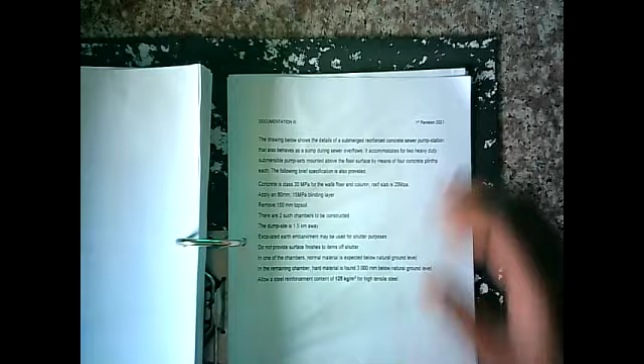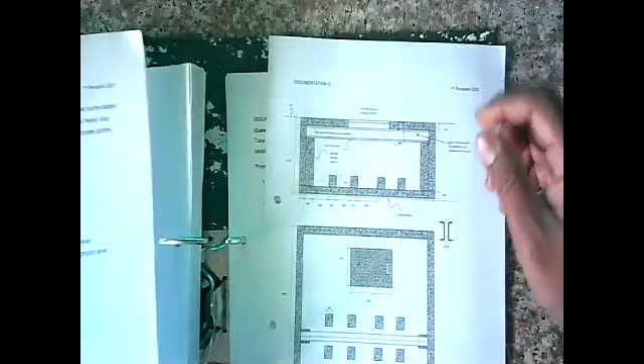All right, page 63, and we're looking at the next question, question 3. And we've got here the drawing below shows the details of the submerged reinforced concrete pump station. All right, now this particular question was, I suspect, a past year test question. So good practice for you guys for a test. All right, so let's look at question 4.

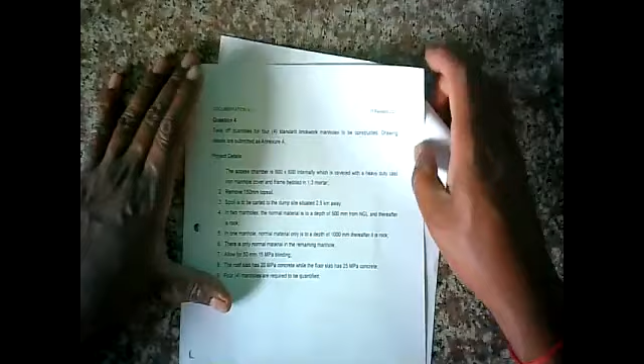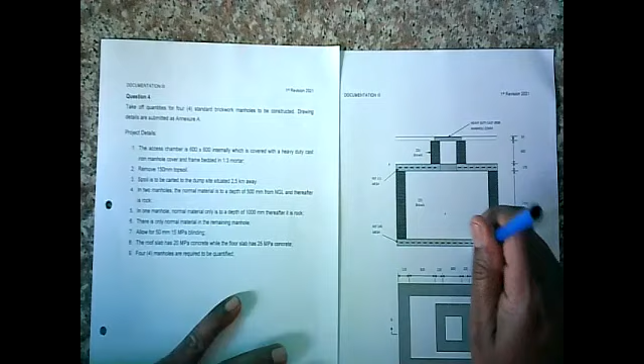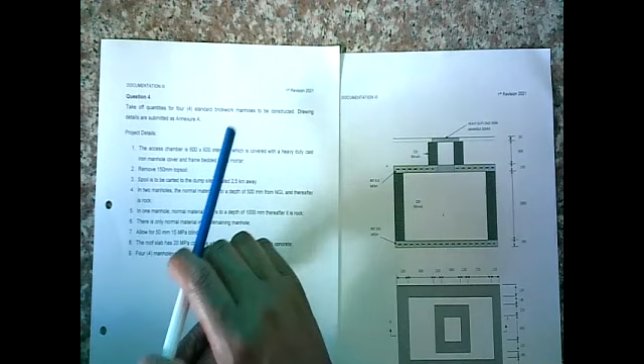All right, question 4 on page 65. And let's get the drawing out. So question 4 on page 65 and 66 asks you to take off quantities for 4 standard brickwork manholes to be constructed. Drawing details are submitted as Annexure A, and here's Annexure A. Project details: the access chamber is 600 by 600 internally, which is covered by a heavy-duty cast iron manhole cover and frame bedded in 1:3 mortar.

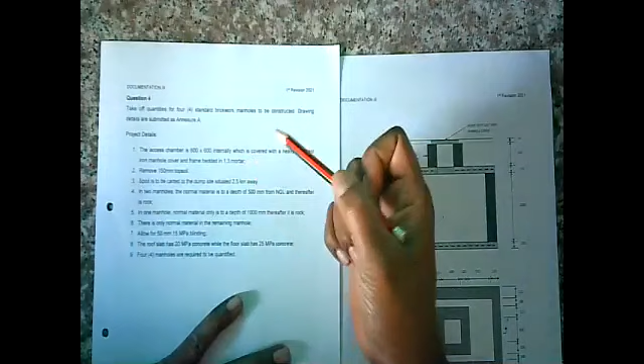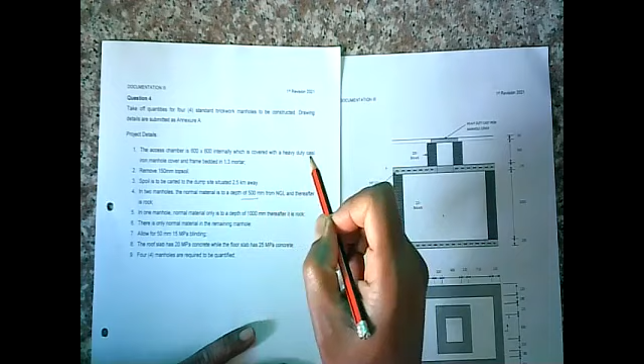All right, remove the topsoil. We know what to do with that. Spoil is to be carted to a dump site situated 2.5 kilometers away. We know how to handle that. All right. 2 manholes: the normal material is to a depth of 500 millimeters from natural ground level, and thereafter it is rock. In 1 manhole, normal material is to a depth of 1 meter, thereafter it is rock. And there is only normal material in the remaining manhole. Oh crap, now what? Multiple conditions.

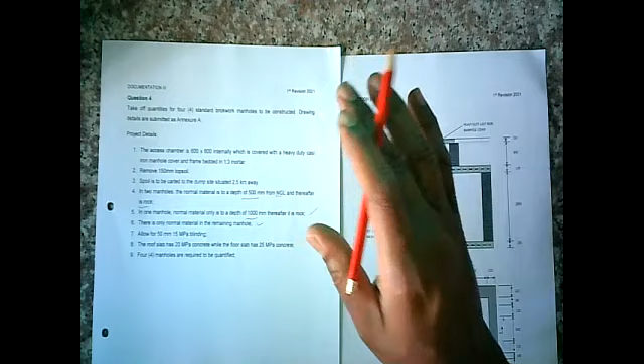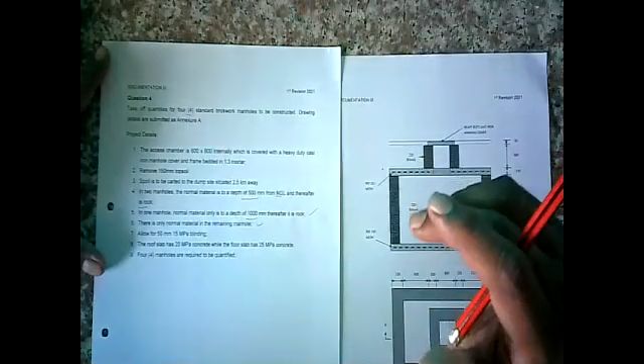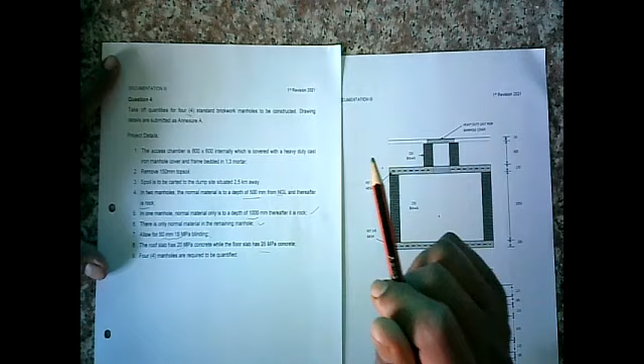And I chose this particular question because coming off the last one, a lot of students may still be a little bit shaky on the concept of extra over, and this question should give you a better idea. Also, we have 4 items. The first thing that should come to your mind, the factor column. Allow for 50 millimeter, 15 MPa blinding. The roof slab is 20 MPa concrete, while the floor slab is 25 MPa. Coming after the last one, 3 different strengths, so we know what to do there in terms of the line items for the bill of quantities.

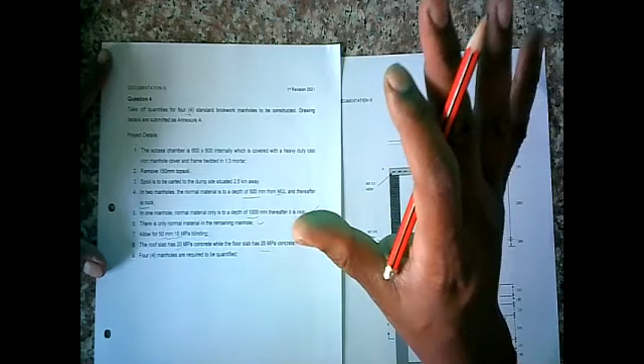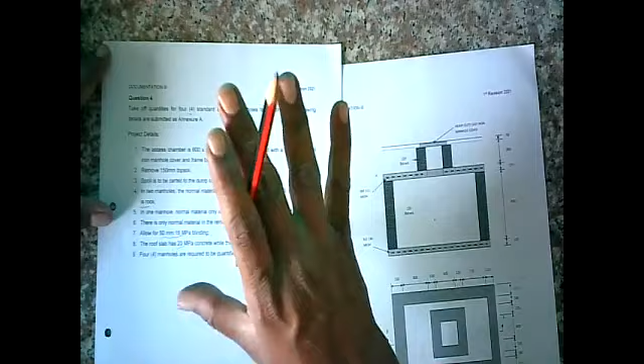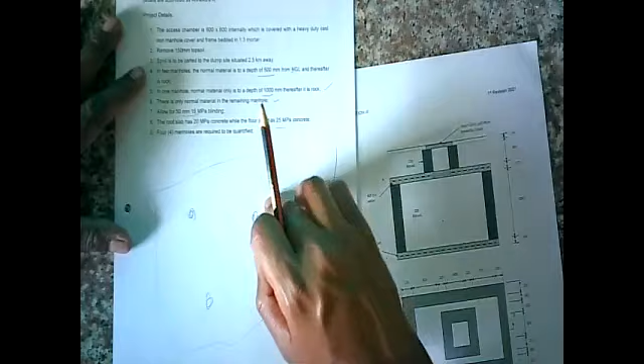And 9 wasn't really necessary, but I had to put it in there because somebody would get confused. I'm saying 4 manholes are to be quantified, not 1. And if you counted the conditions, 1, 2, 3, 4. 4 manholes, different conditions. Think of it like this: you've got a housing development with a road, and a manhole here, a manhole here, a manhole here. The soil conditions are different there, as to there, as to there. That's why: 4 different manholes, because the soil conditions differ in that project.

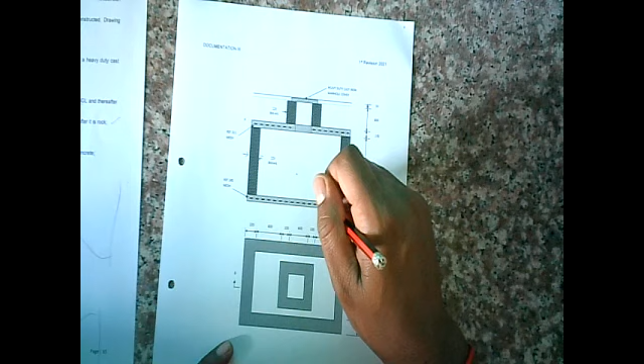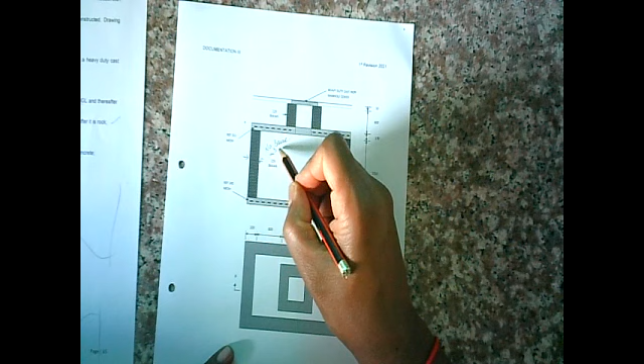Okay, so let's look at the drawing. Compared to the last one, if you recall, we had concrete. Now I'm giving you brickwork. So I'm drawing in some of your knowledge of estimation already, if you haven't realized that. What am I asking for here? I want to know number of bricks, and if I know the area and the thickness of the brickwork, then I can also quantify meter cube of mortar, building sand, all that. So you can quantify mortar.

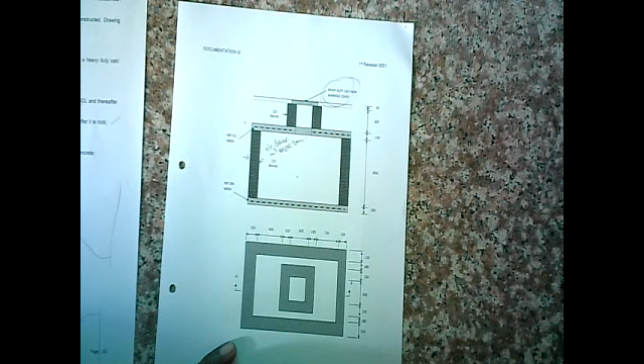So also one more thing. Heavy duty cast iron manhole cover. Believe it or not, that's also part of the quantities. I'll show you how to handle that in your bill of quantities. All right, so let's look at this. Right, let's see what we call this. First and foremost, let's put the page, 65. Right, one.

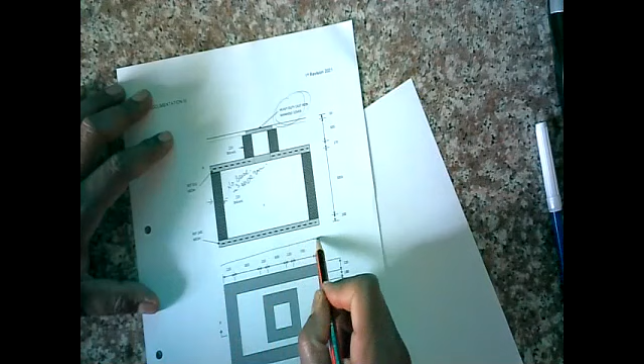Right, what is this? There to there, 3020, and from there to there. Check this out, please. 1840. All right.